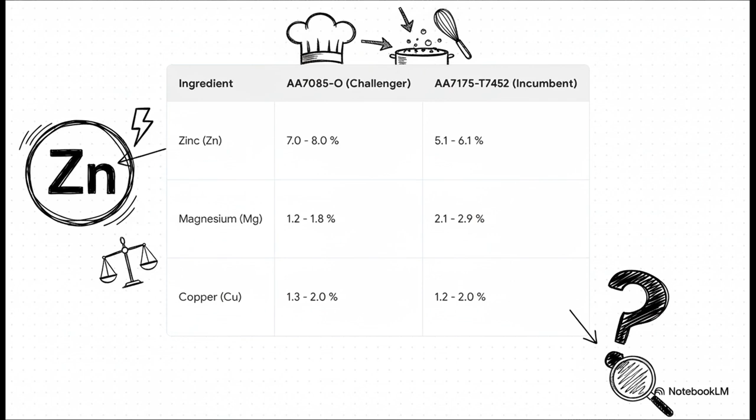You know, like any great recipe, the real secret is in the ingredients. Just take a look at the zinc content. The challenger, AA7085, has a way higher percentage. And that one little difference is a major clue as to why it performs so incredibly well, as we're about to find out.

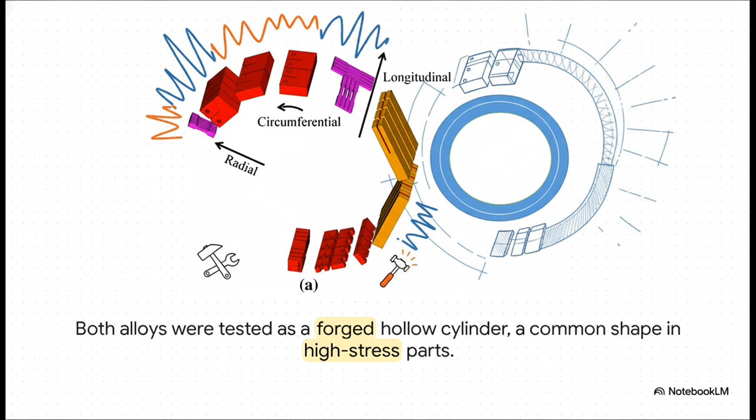Now, to make sure this was a fair fight, both of these alloys were tested in the exact same form, this large, forged hollow cylinder. And this isn't just some random shape. This mimics the kind of components used in really high-stress situations, so the results are going to tell us exactly how these metals would perform out there in the real world.

So how do you find out which alloy is truly the best? Well, you put it through the ultimate stress test. Let's break down exactly how scientists pushed these metals to their breaking point. Here's something that's absolutely crucial to understand. A material isn't always equally strong in every direction. Think about it like the grain in a piece of wood. It's way easier to split it along the grain than against it. So, to get the full picture, the researchers tested samples from 3 different orientations: radial, circumferential, and longitudinal.

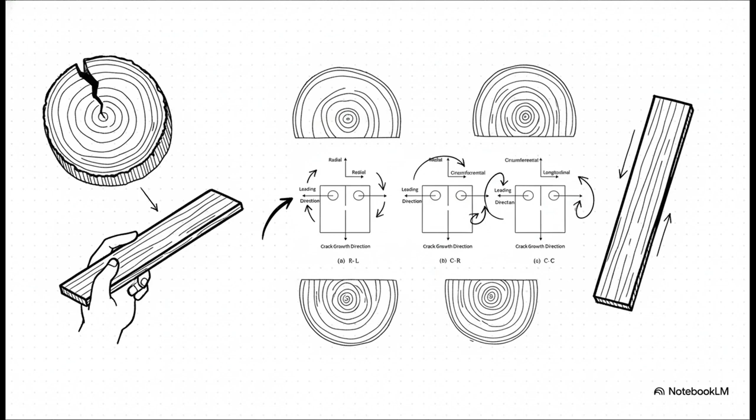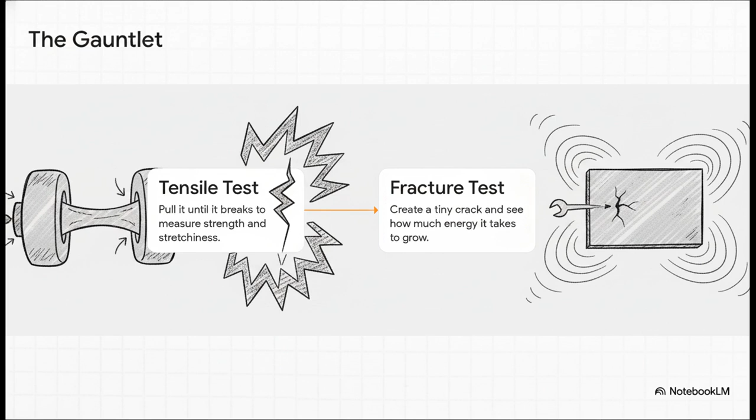The whole testing process, which is based on some really rigorous industry standards, basically boils down to 2 main challenges. First up is the tensile test. You pretty much just pull a sample until it snaps. This measures its raw strength and also how much it can stretch. Then you've got the fracture test. Here, you intentionally start a tiny, tiny crack and then measure how much energy it takes to make that crack spread. This one is critical for understanding how a material can resist a catastrophic failure.

Okay, the alloys have been forged. The gauntlet has been run. All the data is in, and now it is time to declare a winner. First round, yield strength. This is basically how much force a material can take before it permanently bends out of shape. And wow, the result is a decisive blow. The challenger AA7085-O is a full 25% stronger on average. That is a huge advantage right out of the gate.

But you know, strength isn't everything. A material also needs to have a little bit of give. We call this ductility. It's the ability to stretch before it actually breaks. And what do you know, AA7085-O takes this round too. It can stretch significantly more, which means it's not just stronger, it's also more forgiving. It's much less likely to just snap when it's under pressure.

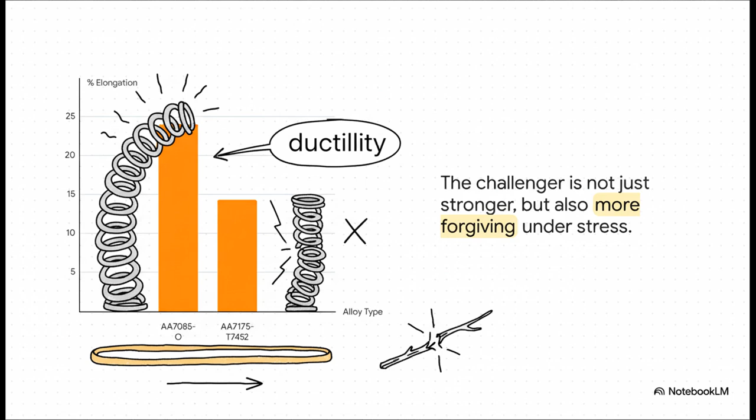And now, for the final round. Fracture toughness. This is the big one, folks. This is all about the ability to resist a crack that's already there from getting worse. And this, well, this is a knockout. AA7085-O is, on average, a staggering 70% tougher. I mean, that is just incredible. It means it's vastly more resistant to the kind of catastrophic failure that every engineer has nightmares about.

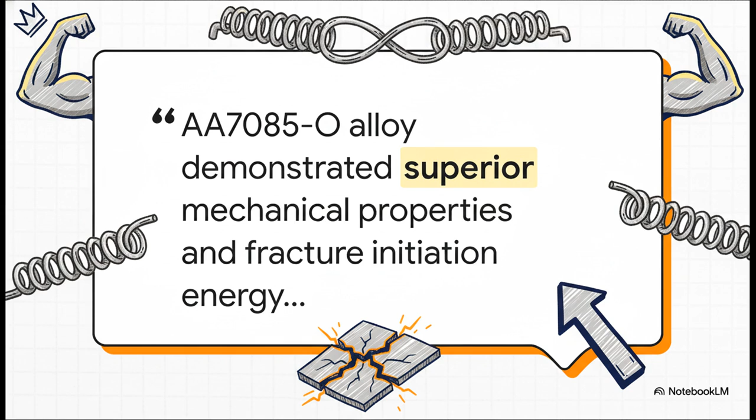And you don't have to take my word for it. The source study itself concluded that AA7085-O demonstrated superior mechanical properties. In other words, it didn't just win, it absolutely dominated across the board, in strength, in ductility, and in toughness. The challenger has officially and decisively unseated the incumbent.

Okay, but why? Why was the victory so one-sided? What's happening down at the microscopic level that gives the challenger such a massive edge? We've got to take a closer look. These images from a scanning electron microscope tell the entire story. On the left, that's our winner, AA7085-O. Just look at all those little dimples and torn ridges. It absorbed a ton of energy. It stretched and pulled apart almost like taffy.

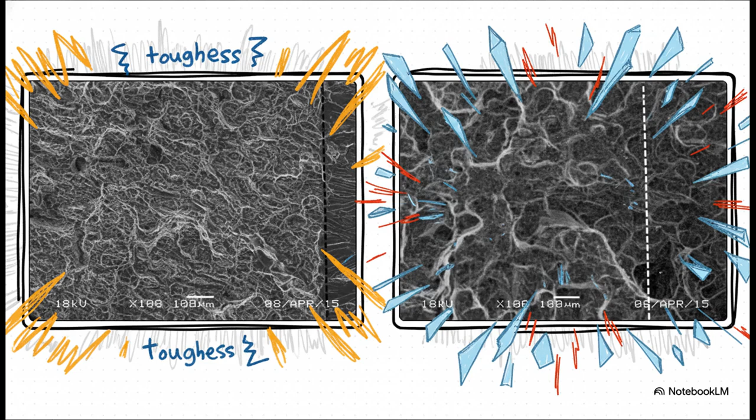Now, look at the incumbent on the right. See how it's a much cleaner, sharper break? That type of failure is called cleavage, and it's much more like a piece of glass suddenly shattering. And this gets us to the absolute core difference between these two metals. It's ductile fracture versus brittle fracture.

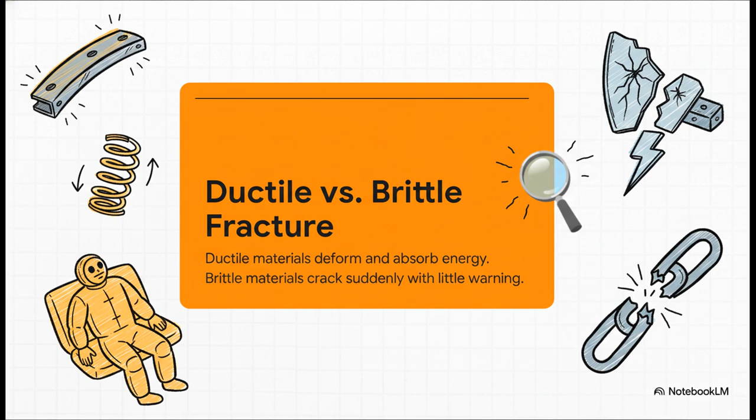A ductile material gives you a warning. It bends, it deforms, it absorbs a ton of energy before it fails. A brittle material, on the other hand, just goes, suddenly, with almost no warning at all. And for any critical component, you always want that ductile failure. It's safer, it's more predictable, and it's just plain more resilient.

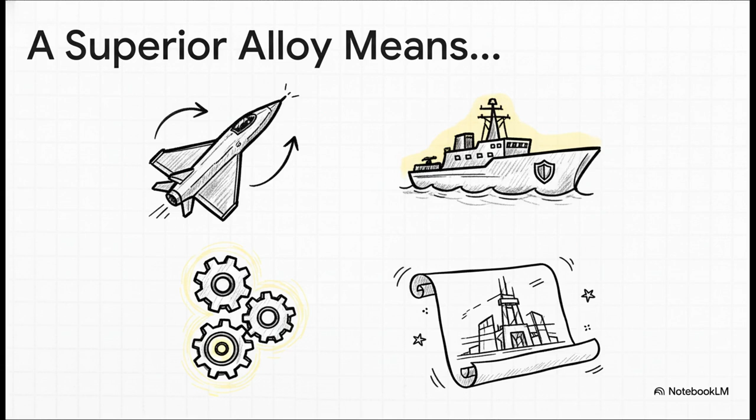So we have a clear winner, and we even understand the science behind why it won. But what does this actually mean for us, for the world outside the lab? Why does any of this matter? Oh, it matters immensely. A superior alloy like AA7085-0 lets engineers design parts that are just as strong but using less material. That means lighter, more fuel-efficient aircraft. It means naval ships that are stronger and more resilient. And most importantly, it means critical components in all kinds of machines are safer and more durable. It lets us push the boundaries of what is even possible.

And that kind of leaves us with a final thought, doesn't it? We often think of innovation as a new design or a more powerful engine, but sometimes the biggest leap forward comes from the very stuff we build with. The next generation of technology, the next great leap in engineering, might just be standing on the shoulders of a new generation of materials.